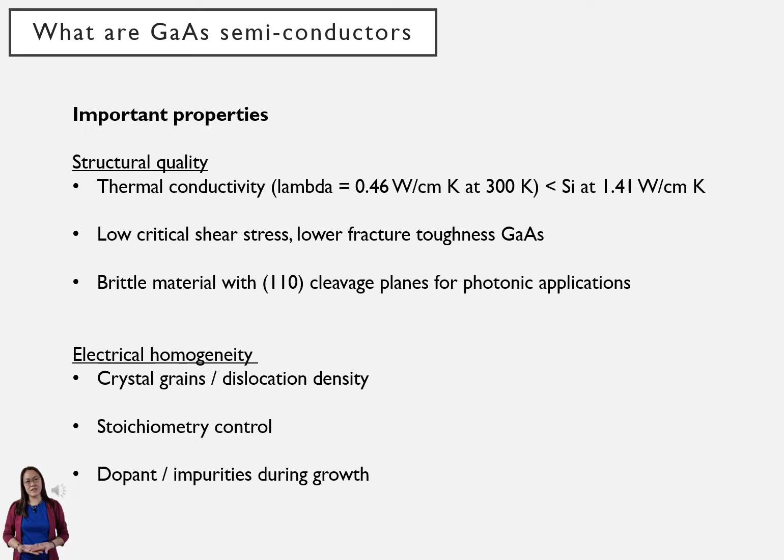While silicon-based technology has been the backbone of the microelectronics revolution, gallium arsenide circuitry operates at higher frequencies and signal amplification powers. Gallium arsenide is a compound semiconductor with a combination of different properties. So here are some of the important properties of gallium arsenide semiconductors. Based on the comparison of various structural and electronic properties, the advantages of gallium arsenide over silicon can be readily ascertained. Unfortunately, the many desirable properties of gallium arsenide are offset to a great extent by a number of undesirable properties. This limited the application of gallium arsenide devices to date.

Then, let's visit my colleagues and see for ourselves which can fit your needs. Hi, Andrew. Oh, hi. What brings you here? I want to know more about LEC. Can you help me? Sure. Okay, I will leave the two of you to discuss it. Let me first explain to you what LEC is and its general process.

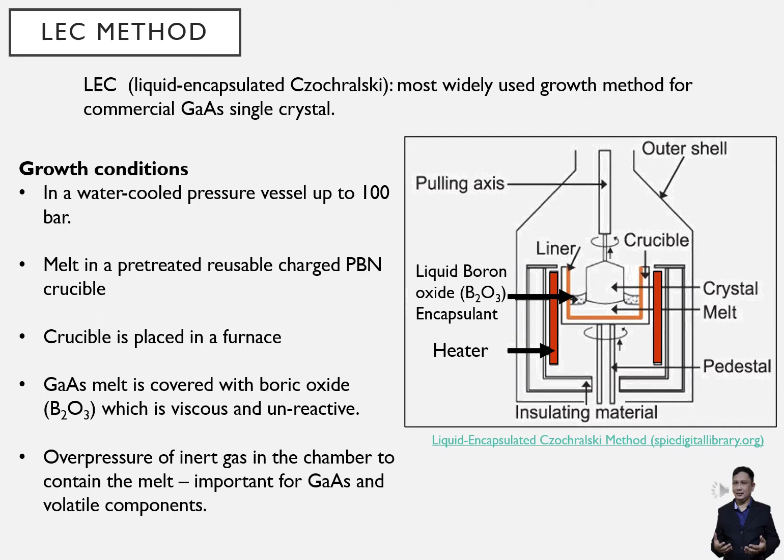LEC is the most widely used growth method for commercial gallium arsenide single crystal. Growth takes place in a water-cooled pressure vessel for pressure up to about 100 bar. It houses a pretreated reusable charged pyrolytic boron nitride crucible that is surrounded by a furnace including heat insulation. The gallium arsenide melt is covered with boric oxide, which is viscous and unreactive. This allows an overpressure of inert gas to be applied so as to contain the melt, which is important for gallium arsenide and volatile components.

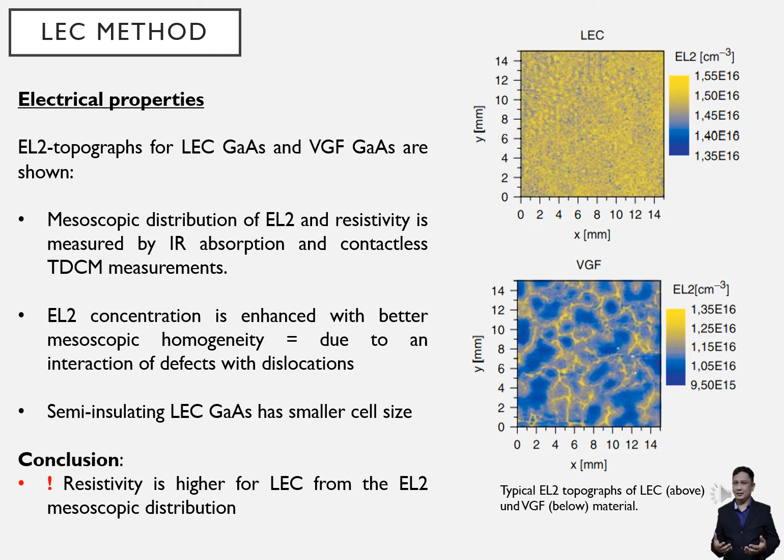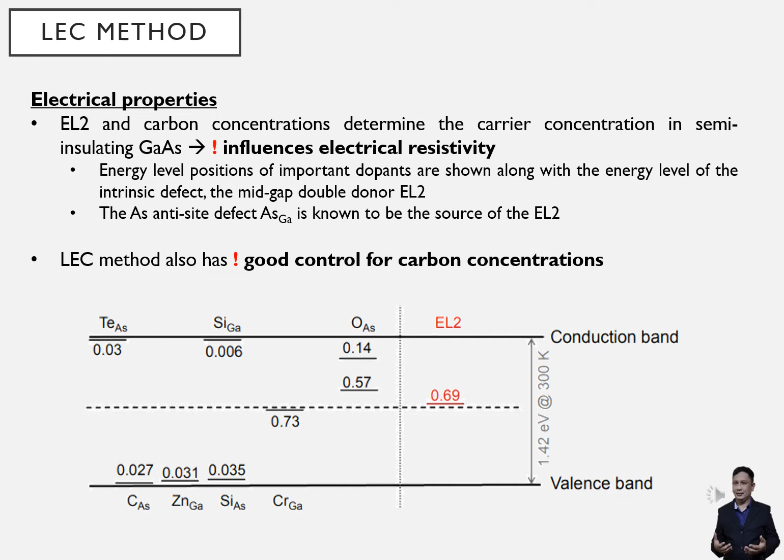The LEC method also has good control of carbon concentration, which is important for the semi-insulating property. To achieve stable semi-insulating behavior, that is gallium arsenide with high electrical resistivity, the following mechanism is utilized. First, there are both N and P-type unintended impurities like silicon or zinc. Second, to compensate the donors, a shallow acceptor is required.

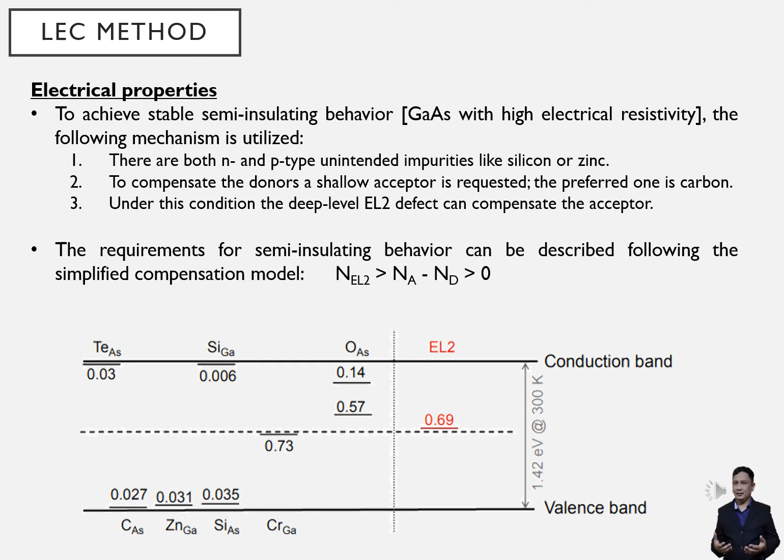The preferred one is carbon. Third, under this condition, the deep level EL2 defect can compensate the acceptor. The requirements for semi-insulating behavior can be described following the simplified compensation model: EL2 is greater than acceptor minus donor, so it must be greater than 0. So, in this explanation, we can see the importance of the mid-gap double donor EL2 and the carbon. And again, LEC method has a good control of this.

In terms of manufacturability, LEC method developed history. It has a good crystal form factor. The PBN crucible is up to 14 inches diameter, can charge up to 50 kg, and thus used to grow semi-insulating GaAs single crystal up to 200 mm. Also, more than 300 wafers can be produced. Fastest growth rate and good for mass production.

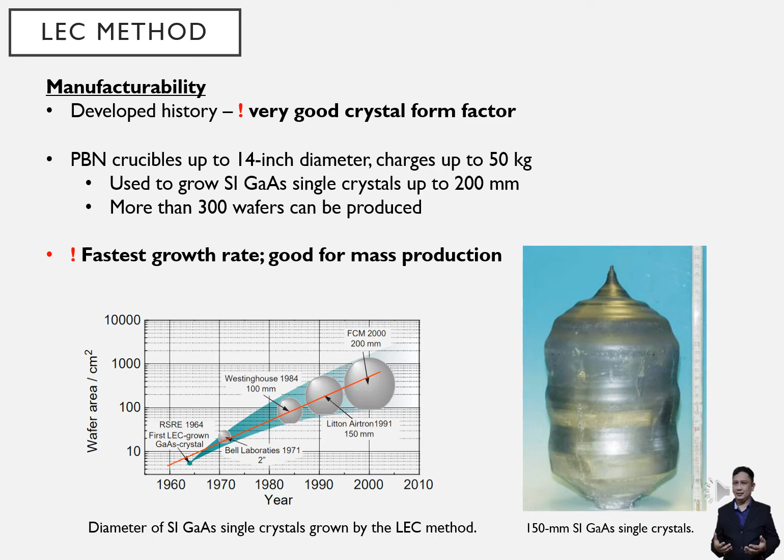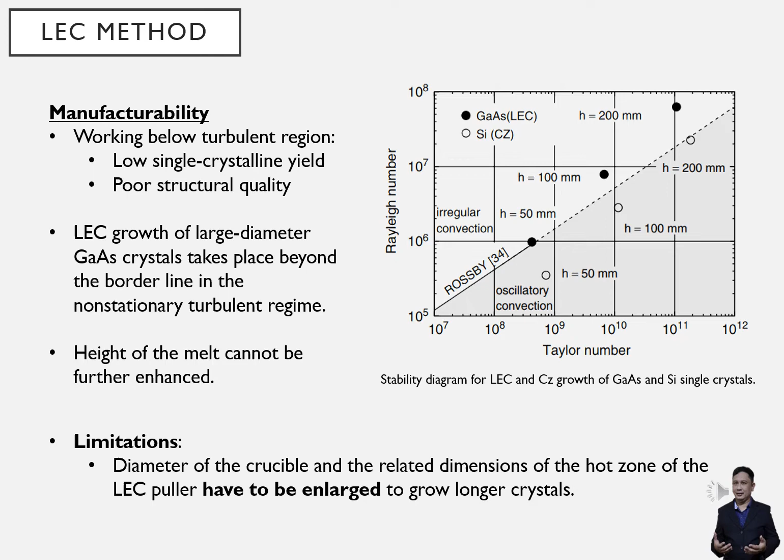Single crystalline yield and the structural quality of crystals are lower if growth is performed with a working point in the turbulent region. LEC growth of large diameter gallium arsenide crystals already takes place beyond the borderline in the nonstationary turbulent regime, as shown in this diagram. Height of the melt cannot be further enhanced, and therefore, the diameter of the crucible and the related dimension of the hot zone of the LEC puller have to be enlarged to grow longer crystals.

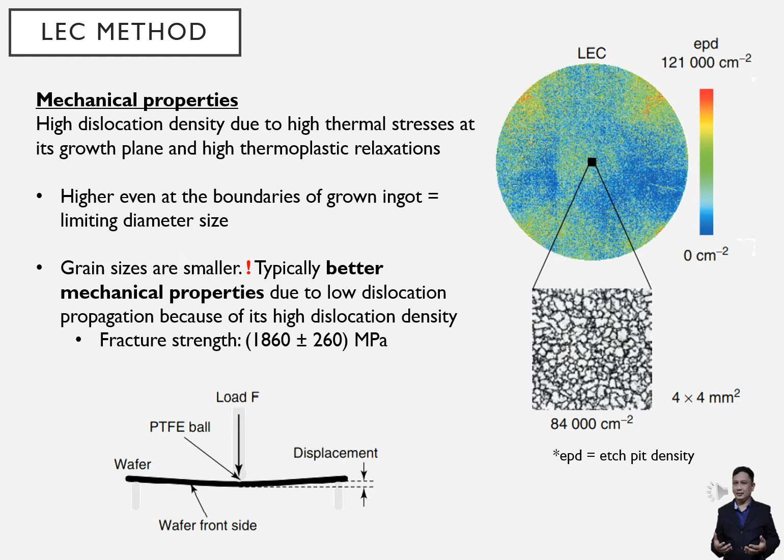For the mechanical properties, LEC method has high dislocation density due to high thermal stresses at its growth plane and high thermoplastic relaxations, higher even at the boundaries of the growth ingot. Grain sizes are smaller, typically better mechanical properties due to low dislocation propagation because of its high dislocation density.

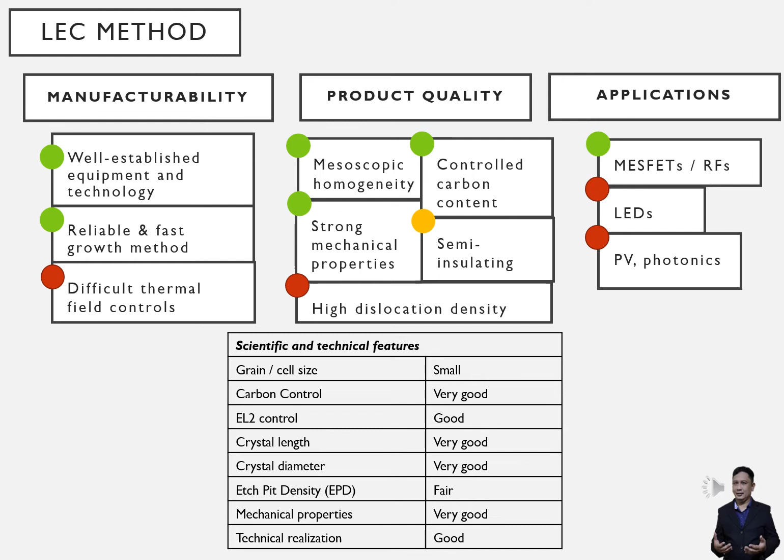For the summary, in terms of manufacturability, it has well-established equipment and technology, a reliable and fast growth method. However, it has difficult thermal field controls. In terms of product quality, it has mesoscopic homogeneity. It has a well controlled carbon content. It has strong mechanical properties. It has very good semi-insulating properties. However, it has a high dislocation density. The typical application of LEC grown gallium arsenide is for MESFETs and RF transistors, which are presently in demand in the market today.

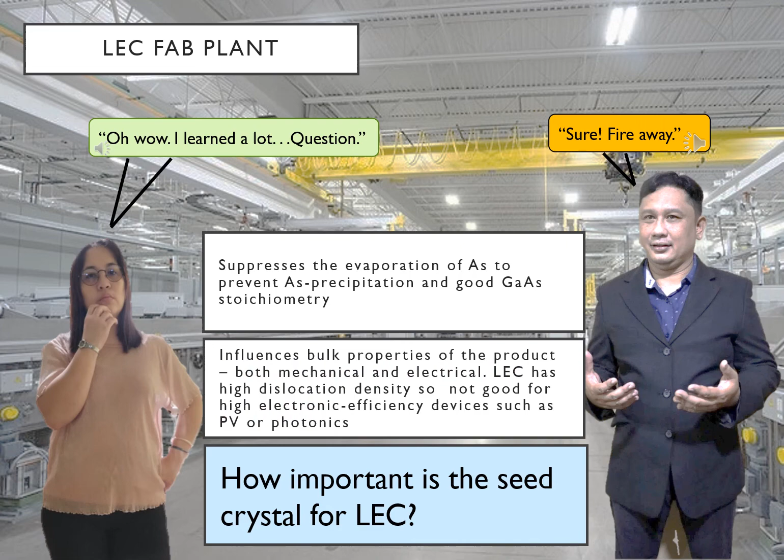Oh wow! I learned a lot. But I still have a few questions. Sure, fire away. Seems you enjoyed a lot, Miss B. Definitely. Now let's go and meet my pal on the Bridgman methods. Ernest. Long time no see, Neon. Hello there. Hi! We were thinking if you can help Miss Being here to learn more about your process.

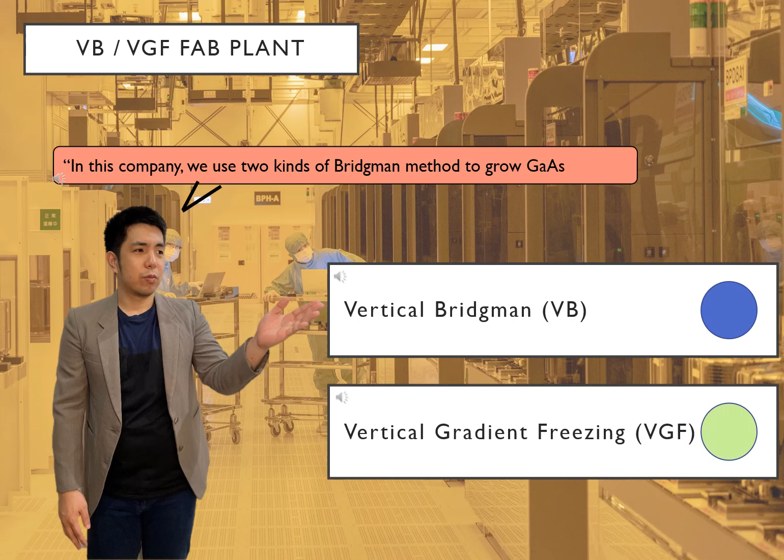Now this crucible is slowly lowered through a temperature gradient across the crystallization temperature of gallium arsenide. There are certain controls in place in order to keep the surrounding temperatures in check. Lastly, it is also important that the solidification or the crystallization temperature is gradual across this movement to ensure low formation of dislocations in the crystal.

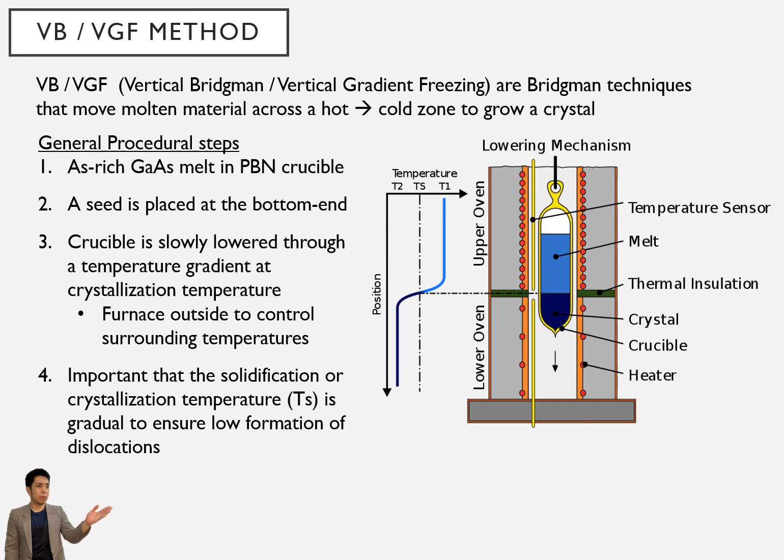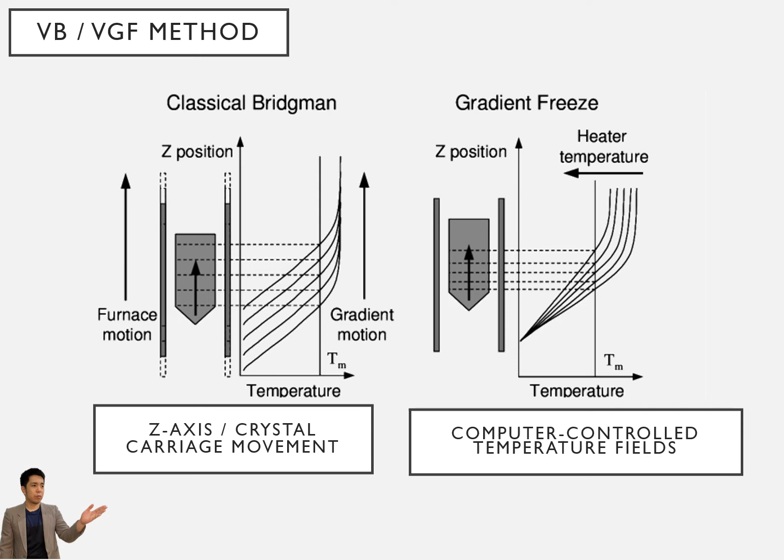The vertical Bridgman or the classical Bridgman is quite similar to that of the vertical gradient freeze method. Both methods utilize the same concept that I described earlier, in which both conditions need to move across a temperature gradient. The only difference is that the vertical Bridgman utilizes the crystal carriage movement, or the entire assembly moving along the z-axis, whereas on the vertical gradient freeze, there are computers that control the temperature fields in order to simulate the movement.

In both methods, due to the gradual change in temperature, gallium arsenide crystals solidify slowly as well. This results in larger grain or cell sizes of the crystals that affect the mechanical properties entirely. With controlled temperature environments, there are less variations to the temperatures that will result in a low dislocation density crystal. Similar to LEC, von Mises stresses for Bridgman-grown crystals are still higher towards the periphery, but due to its larger grain size, it's still less than that of the LEC method.

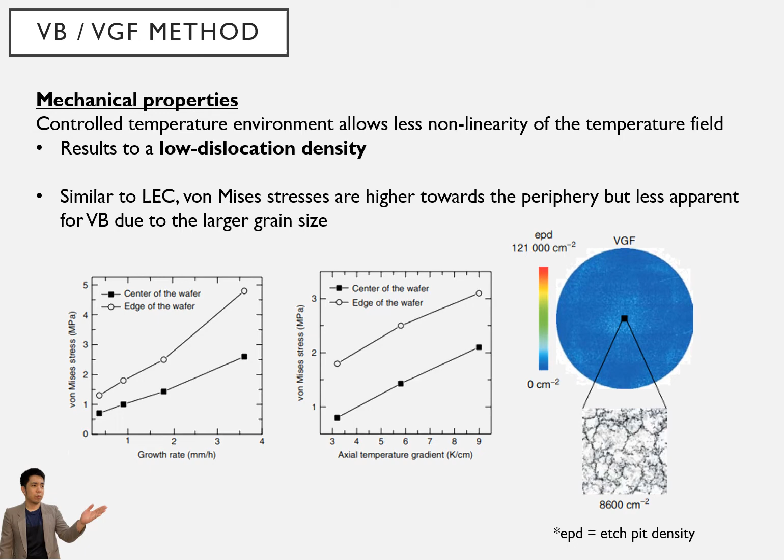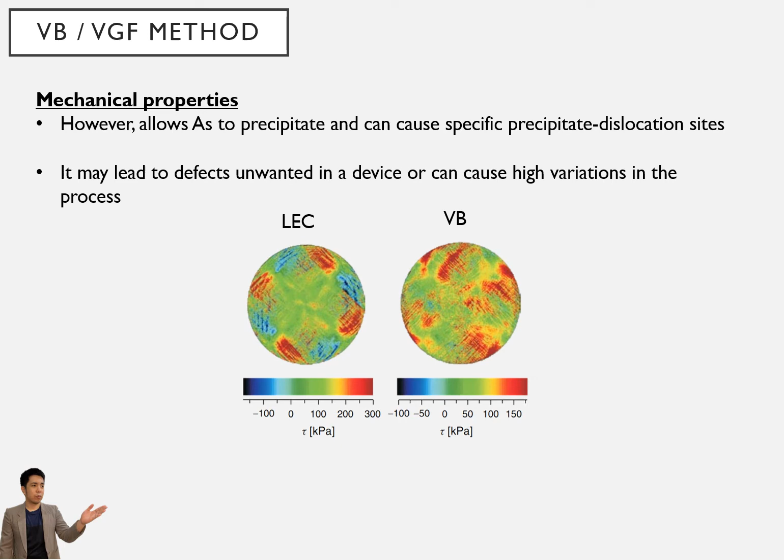There are some drawbacks, however, for our processes. Arsenic can still precipitate readily as the crystal solidifies and settle in the dislocation sites. These cause precipitate dislocation sites that can be unwanted for high-end devices. What you see here below are higher shear stresses at the red zones for VB going up to the center of the ingot, whereas LEC has far less shear stress sites. However, this can be easily resolved simply by annealing the crystal.

We do acknowledge, however, that there can still be some impurities from the system that cause deposits with gallium arsenide, and that is carbon.

For gallium arsenide manufacturing, it is a fairly easy process. Since the whole ampule is moved for VB method, we're considering VGF method to be stationary with only temperature fields being changed, then there is hardly a problem for mechanical parts. The GaAs polycrystals are fed into one location of the ampule and is lowered to form the melt and the single crystal. It only requires one feed-through, unlike LEC, which requires two pulling rods.

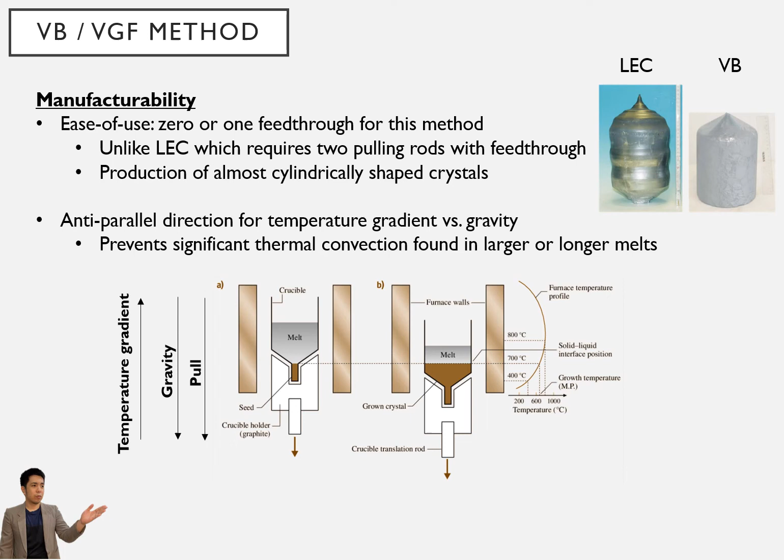The end product is also reliably consistent in a cylindrical shape, which you can see in the images on the right, which states better product uniformity than LEC. The reason behind is that the temperature gradient is antiparallel to the pull of gravity and its movement. This results to less thermal convections that may affect the crystallization temperatures experienced at various parts of the ingot found in long melts. This makes VB and VGF methods to be less costly in terms of investment and operating expenses for large-scale manufacturing.

The downside is the throughput is lower due to the precise control of the temperature gradient. This also affects the pull speed, limiting both methods to a maximum growth rate of about 1 to 3 mm per hour. We can speed things up a bit, but this will affect the dislocation densities and will be economically costly versus LEC. Furthermore, there is a surprise in every ingot pull.

There are hardly any visual controls or indicators as the ampule is lowered in the system, so to see if the crystals have already some defects or deformation, it will be hard to abort the run and have to reload the process. To mitigate these, there are some methods being employed by our R&D team to make use of magnetic fields to further control the temperature gradient and thus the crystal growth in the system.

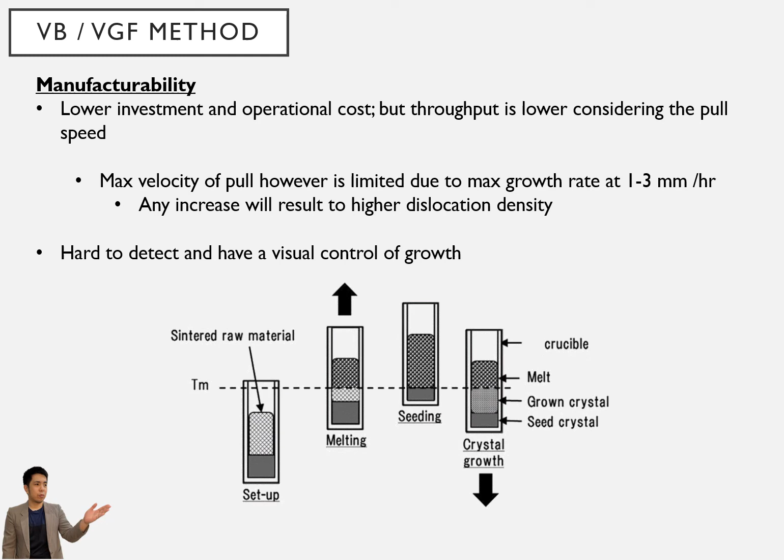In summary, VB and VGF methods are very similar with each other, except for their manner of cooling or solidifying gallium arsenide. This results to overall low capital expenses and good quality product, however at the expense of throughput. Both methods, when compared to LEC, are mostly influenced by the grain or cell sizes. It results to low EL2 defects and low residual strains, forming a good candidate for high-end electronic products.

We do have to keep in mind to control the impurities such as carbon and arsenic precipitates by annealing the grown crystal, which adds to lower productivity for these methods. But considering that the future will start to shift towards gallium arsenide devices, both VB and VGF methods seem good techniques to cater the increasing demand.

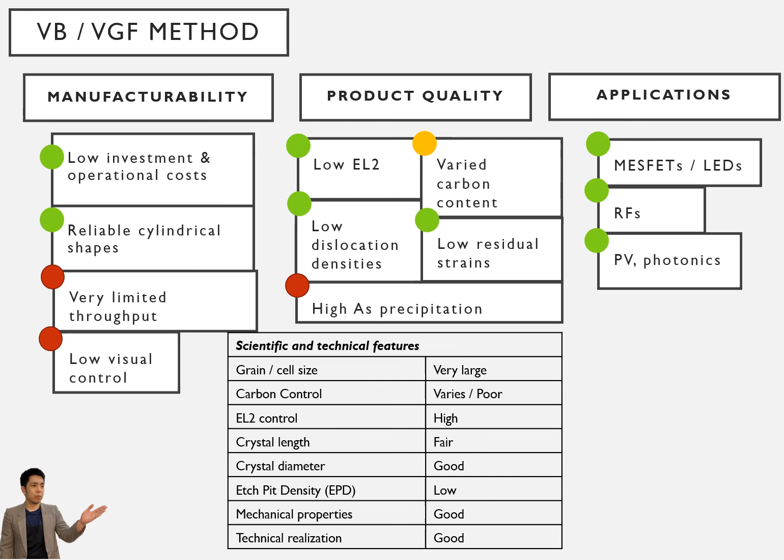So, let me clarify some things. Busy as always. Anyway, I think VB, VGF methods need a lot of attention in order to be productive. Let's go back and summarize what you got. Correct. Thank you for your time. Now let's list down the pros and the cons for each. Can you share what you have learned so far? Yes, here's what I got.

The LEC and VB and VGF methods in terms of impurities are on the same level. LEC has high dislocation density and carbon control. Its crystal length and diameter are fairly suitable, as well as its manufacturability. And this method is already established. While the VB or VGF method's primary advantages are its low cost, low investment, and low operational cost.

For the applications, LEC is more suitable to FETs, micro devices, and implantation. Then the VB-VGF methods are for LEDs, photonics, and PVs. For my present investment, I think I'll go for LEC method, since this is suitable investment for large-scale production. This is to cope up for the present-day demands. And moving forward, my company will adopt the VB or VGF method as it's very promising, easy to manufacture, and cost-effective.